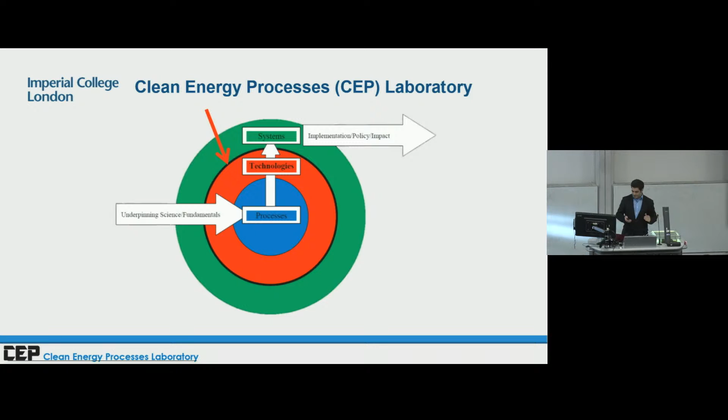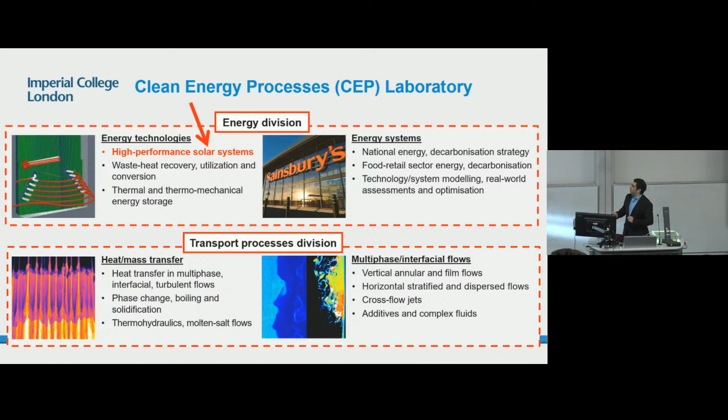So there are a lot of things going on in the group. We've split ourselves into divisions over the years, and unfortunately I can't present all of the work that's going on. I'm just doing that one bullet point, and I wanted to say thank you also to all the people that contributed over the years who don't necessarily fall into this category, but whose work has certainly helped the group in everything we've been doing.

So I'm going to start nice and easy. This is just motivation, and you'll be familiar with this — photovoltaics, the panels you find on roofs of buildings. But this picture is really about power generation: very, very large plants, typically in the desert, somewhere with sun and no people around. So photovoltaics, we're very familiar with this.

There's another technology which is very important in the context of large-scale power generation from the sun, called CSP, concentrating solar power. CSP is very different in the way it converts sunlight into electrical power, but nonetheless the overall concept or result is the same: harness the sun and generate electrical power.

Now these plots are quite interesting, and I'll say two quick things. By the way, these are real costs — these dots are real costs. This is something called the levelized cost of electricity, which is the total cost to produce a unit of electrical energy over the lifetime of a project — the capital cost, maintenance, operating cost, everything over the lifetime of the system.

At the bottom here there's a green bar, a range, an area, and that's where you'd find conventional fossil fuel generation. So I'm going to make two statements which aren't difficult to make at this stage, in the year 2020. One is that generating electricity from sunlight through these technologies, either one of them, is now competitive with conventional power generation. You might have been able to argue that solar is expensive 10 years ago — this is no longer true.

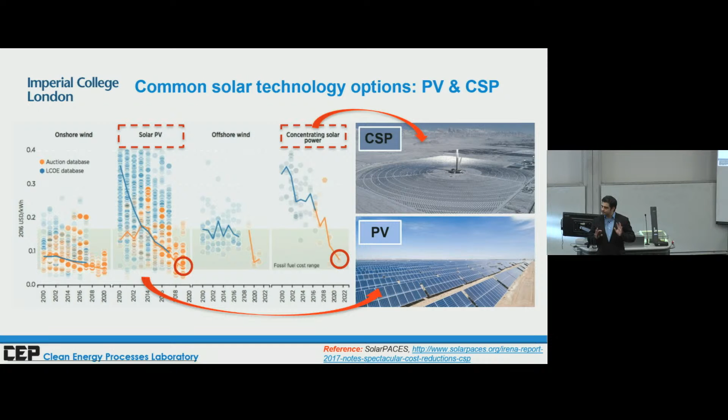The second thing is you might say, yeah, but these things don't work at night, and once you add the cost of batteries, the costs go up. Well, yeah, but CSP, which has dropped just like PV very significantly, these projects can have anything from 4 hours to 16, 17 hours of storage. They can run flat out almost, night and day. So the argument that solar doesn't work at night might have had some sway 10 years ago, but not anymore.

Now this is large-scale power generation, and I wanted to make the point that I'm not going to be telling you about large-scale power generation today. We're going to be talking about smaller systems.

So systems that you can install, so-called distributed applications, in your home, buildings, neighborhoods, communities, small communities, from a few kilowatts up to a few hundreds of kilowatts. Typically, these smaller systems in distributed applications are closer to cities where people live, and you have constraints. You can't just go out in the desert and put mirrors and start concentrating to get very high temperatures. Due to these constraints in space, you can't have too many mirrors, you can't get too high temperatures from the sun, so you end up with so-called non or low concentrating systems at low temperatures. It's not always the case, but it's typically the case that you're constrained in distributed applications, because there are buildings around you and people.

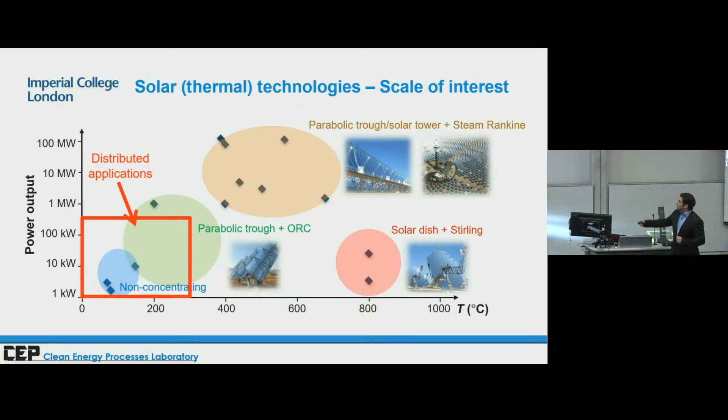So here's what we're going to be focusing on: smaller scale systems and lower temperatures. What's available to us? On the left-hand side, things that you probably already know.

So we have photovoltaics. You can install them on your roof. They give you electrical power. They're very dedicated for this particular job, generating electricity from photons from the sun, and they're very good at it. And on the left, you have something called solar hot water heaters. These are systems where there's a liquid that flows, typically might be water, might be something else. In any case, you heat up this liquid, you store it in a tank if it's water, and you use it later to have a shower or whatever else you want. Again, a very different job by a very different technology. But hot water, heating, electricity, these are energy forms that we both need.

So the question that arises at this point is, can we get both? Well, of course you can get both, you can just put the two systems side by side on your roof. But the question is, can we go one step further? Can we get both from the same panel, from the same collector area, and can we get them in a way where there's a synergistic benefit, where there's a benefit to the electricity and the hot water relative to side-by-side systems? And the answer is yes.

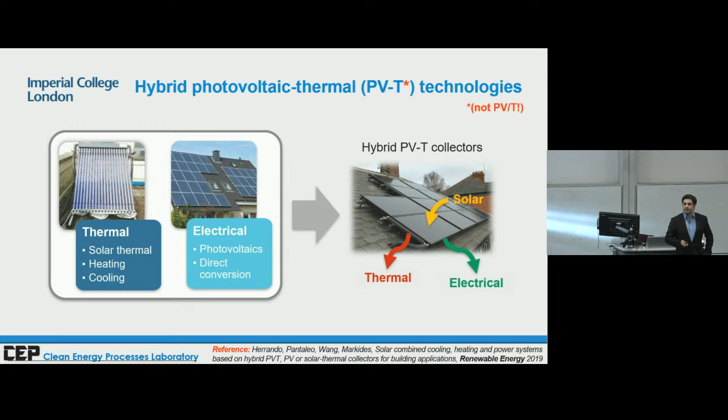There's something called hybrid PVT collectors, where the sun goes in, you have an electrical output, and you have a thermal output. That thermal output can be delivered as useful heat to an end user. So this is existing stuff, we didn't do anything new here, but why, and what is the synergistic benefit here?

So this is a plot of the efficiency of photovoltaic materials, different materials. You can pick any one of those lines you want. And what you find is that as the temperature of the cell gets higher and higher, the efficiency of that cell gets lower and lower. In most cases, linearly.

So I'll say two things. Number one, when is your solar system generating the most electrical energy? When it's sunny and warm, correct? So exactly at the conditions where you think you have the potential to generate a lot of electricity from your solar PV system, guess what? Your solar PV system is getting hot and you're losing a lot of power. In hot countries, this could easily go up to 70, 75 degrees. And that's a 20% drop in efficiency because the system is getting very hot. Now, a 20% efficiency drop is something like 5% of all of the power generation of Europe, lost globally, simply because of this. Just to give you a feeling for this, it's a large amount of power which is lost due to this efficiency drop.

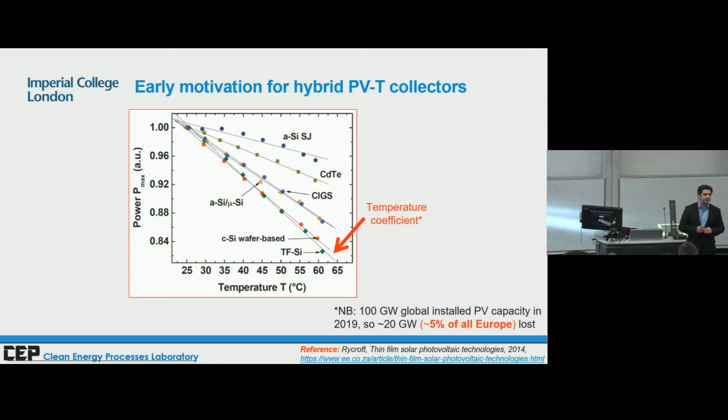Now, this is a problem, but it's also an opportunity, because if you really think about it, it's telling you another thing, which is that if you're able to go back the other way, from right to left, somehow by cooling the cells, then you can get a higher efficiency than you would have had otherwise, while at the same time having some heat to deliver. And this is where solar PVT comes in.

Behind that, you have a flow of some fluid. It could be water, it could be air, it could be anything you want. Most of the time, it's water or air. The idea here is that you have a very good thermal contact between the cells and the fluid, and that's what allows you to pull a lot of heat out of your cells. Now, there's another consequence of this, which is that the temperature of the fluid and the temperature of the cells are actually very close together because of this good thermal contact. We'll come back to this in a minute.

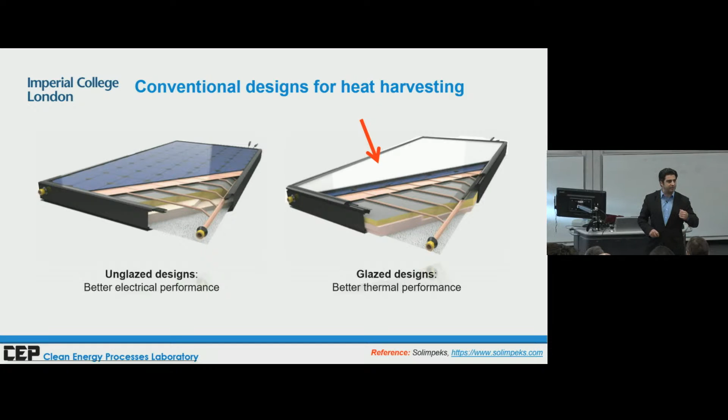And that's not good for us, because ideally you never want to trade electricity for heat, because electricity is much more valuable than heat. We can talk about how and why, but I think most people would understand that electricity is more valuable than heat. So you don't really want to play this game where you're losing electricity to deliver heat.

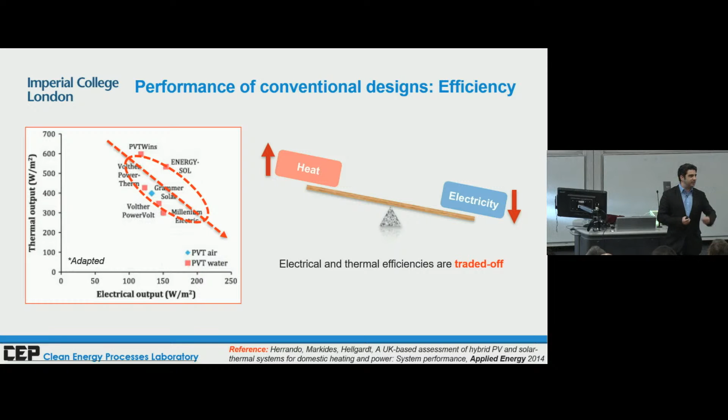Now, a second limitation to conventional PVT designs, other than this link between electricity and heat where you trade one thing off for the other, is that you're limited in terms of temperature. So we said a couple of slides ago that the temperature of the fluid and the temperature of the cell are very close together, and they're connected very tightly. So if you try to run your water stream very hot, so you can do a lot of things with it, your cells are running hot. And vice versa, if you try to cool the cells, then you're going to have a very low temperature thermal output, which is very bad for you. So that's a problem and a challenge for us.

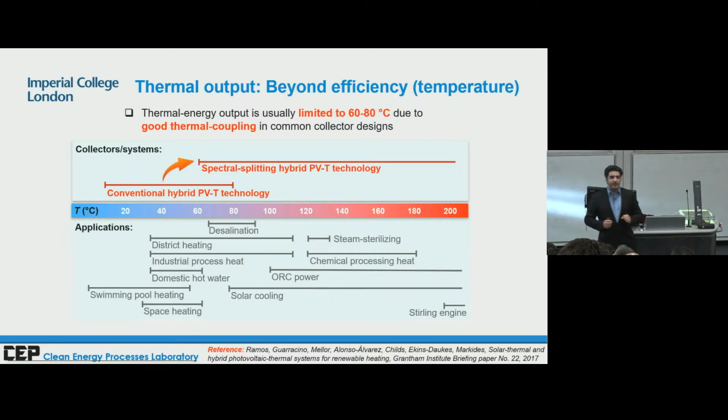So there are two things that we want to do. Number one, we want to break the link between the efficiency trade-off that we were talking about before, and also we want to break the temperature link. We want to have a very high thermal output in terms of its temperature, and we want to keep the cells cold. So how can we do that?

Well, we can do it by basing our designs on a very different principle to what conventional collectors are doing. Instead of connecting the cells to some kind of thermal absorber very tightly, we realize that sun is something which is broadband, right? It's distributed over different colors. There's UV, there are different colors, visible, infrared, different wavelengths. And photovoltaic materials are not sensitive to all wavelengths; they're only sensitive to some of them.

So could we magically take the sun, split it into two parts, one of which are wavelengths that the cells are sensitive to, and we send that to the cells, and the other one of which is wavelengths that the cells are not sensitive to and not send it to the cells, because all they're going to do is just heat up the cells unnecessarily. They cannot become electricity, right?

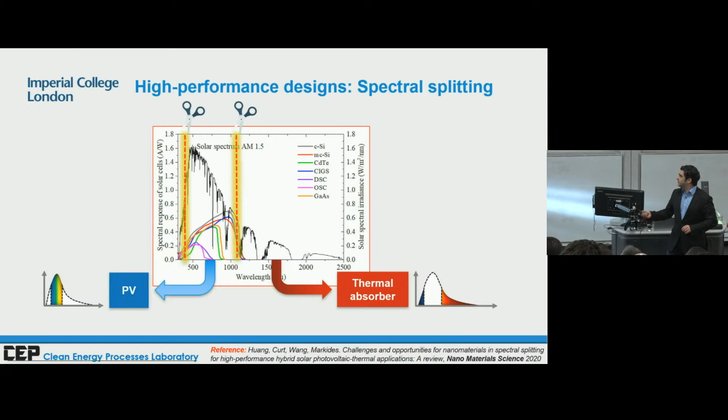Can we do this? Can we split these two things? And the answer is, well, yes, we can. There are many ways to do it. We can preferentially reflect some wavelengths using magical mirrors. We can preferentially absorb different wavelengths by using magical filters. And we can use semi-transparent solutions, and I'll show you some of this stuff a little bit later on. But there are ways in which we can do this.

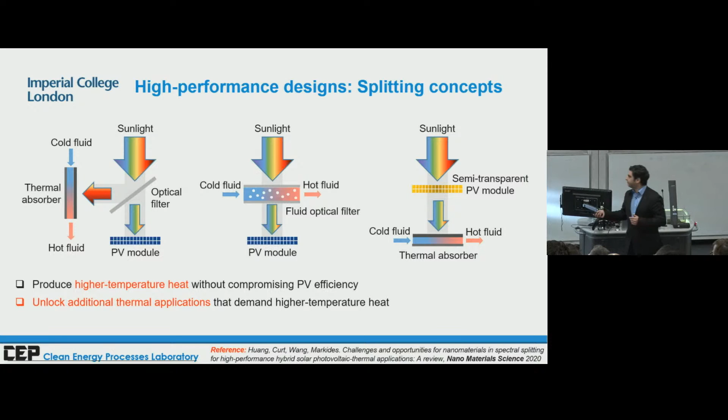And there are designs in literature that have been proposed. Here I'm just giving you a couple of designs that rely on preferential reflection of some parts of the light to something that gets hot, while the rest of it goes through to the cells.

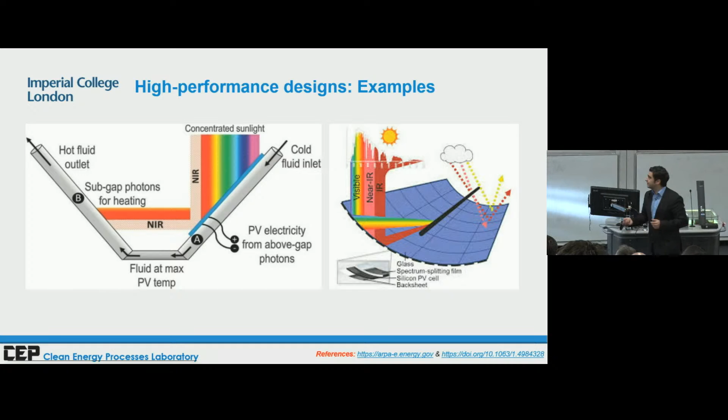Okay, so that's the background. Now, what have we done? Because all of that is work that other people have done, right? So this is us riding on the shoulders of giants. That's where we were, and this is where we come in.

So I want to take you through a journey where we start from the fundamentals, the science. What materials should we use? Let's go to engineering. How do we design components, collectors? How do we optimize those collectors? And then how do we use those collectors within wider systems to really understand what potential they have in real applications? Okay, let's start from science.

What materials should we use for spectral splitting? What materials and coatings can we use to suppress heat losses? And I'll just say one word and go quickly to the next slide: in a PV panel, losing heat is not a problem, because if you lose heat in a PV panel, you're cooling your panel, you get more electricity, that's great. But in a PVT collector, heat is something you want to deliver, so you don't really want to lose it in the first place. You want to trap it.

There are two ways in which heat is lost: by convection and by radiation. Cutting down convection losses is easy, right? You can pull a vacuum, you can put this glazing layer, and you can pull a vacuum, and vacuums are very good at suppressing convective heat losses. So that's good for us.

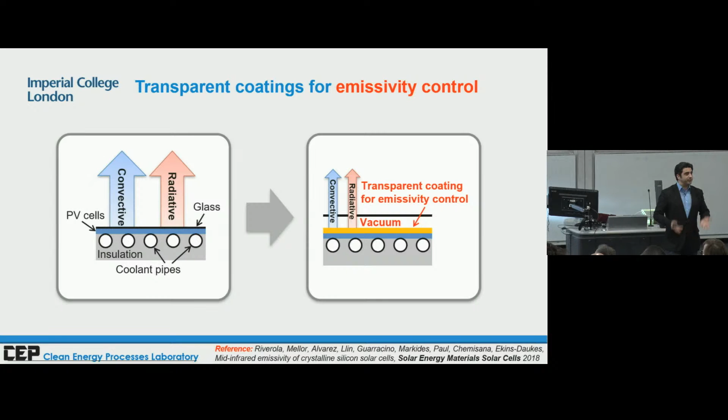But how do you suppress radiative losses? Well, those of you that know about radiation will also know that there's something called emissivity, which is a property of some surface that tells us how much it can emit radiation outwards. So we could just have low emissivity, which means it's not radiating outwards, so we're trapping all the heat and not losing it by radiation. And that's easy to say, but there's a problem: emissivity and absorptivity are the same thing. So if you have a surface with very low emissivity, it also has very low absorption, which means you're not trapping the sun in the first place.

You're not absorbing the sun's energy, so how do we overcome this problem? Well, we overcome it by having so-called emissivity control, or selective emissivity, which means that at the wavelengths where the sunlight is coming in, we want a very high absorption. And luckily for us, at the wavelengths where your surface is re-emitting as a black body, which are separated, we want a low emission, so we don't want to re-emit that back out. So we want to trap the sun and not send stuff out.

And there are ways to do this, and this is some work we did with a very good colleague of mine who was at Imperial. Unfortunately he's now left, he went to Australia, Ned Ekins-Daukes, where we tried ITO coatings to see whether we could affect the emissivity of silicon solar cells when we applied them as coatings. And the answer is yes, you can. The real question is, by how much? How are you affecting the efficiency? We'll come back to that later.

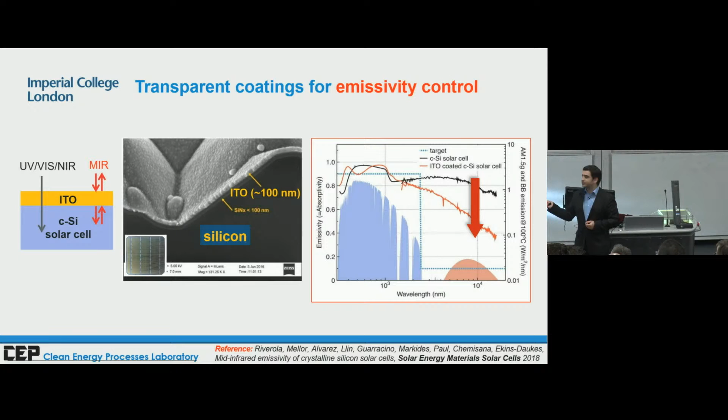Now, what do we do about these optical filters, these spectral splitting filters? I know this is a complicated picture, but if you really think about it, what we've just said is that some part of the spectrum needs to be split off and sent to the cells. So the question is, which part of the spectrum? Which are the two extreme boundaries of wavelengths that we need? And the answer is, well, it depends on a lot of things: the photovoltaic material, the concentration, and a lot of things. But it also depends, and this was a very nice bit of work that Gan did over here, who's going to help in a minute.

So there's another thing it depends on, which is the relative value between heat and electricity. How much of the spectrum gets sent for electricity and how much for heat depends on this value between electricity and heat. And there are many ways to define this value. You could define it thermodynamically, based on second law arguments, or it could be an economic value. Heat and electricity cost different things.

You could define it different ways, but whichever way you define it, once defined, you have maps that generate for different PV materials, which are the limits of the part of the spectrum you want to split off, and if you do that in an ideal way, what the efficiency is of that particular solution.

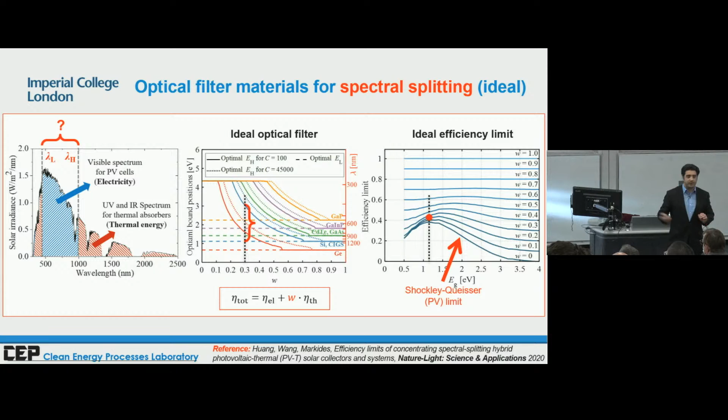So this is ideal stuff. But how do we do it in reality? Well, there's a lot of people working on nanofluids, which is liquids with suspensions of particles in them. They're very good at absorbing different parts of the spectrum. All of this absorption characteristic depends a little bit on the material, the size of the particle, the shape of the particle, the concentration. So there's a lot of work going on.

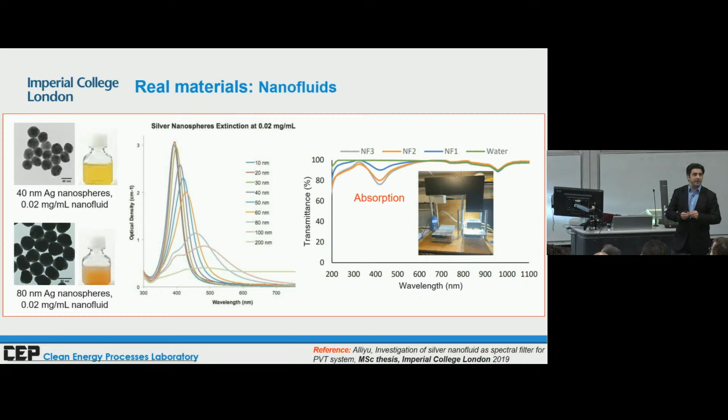We've done a little bit, but not a lot in this space, because there are problems with suspensions, typically that the particles can agglomerate and come out of solution, and that's a problem. So we took a different route.

We said, why don't you try to absorb into a liquid phase itself? Liquids can absorb. Water is a very good example of this. Water absorbs infrared very well.

And if you look at groups of different chemicals, there are different types of bonds and different chemical substances, and those have very different characteristics. So we're applying a methodology called molecular design, and we're at very early stages of this, but conceptually I think you get the picture here.

What we're trying to do is identify the absorption characteristics of different types of groups. And if we know those absorption characteristics and we know what type of filter we need, then which combinations of those groups would give us the optical filter that we need.

This is the type of approach that in chemical engineering is quite common. It's applied to solvent design, working fluids for different types of cycles and things like this. It's a known approach, it's just the first time it's been applied to this type of problem.

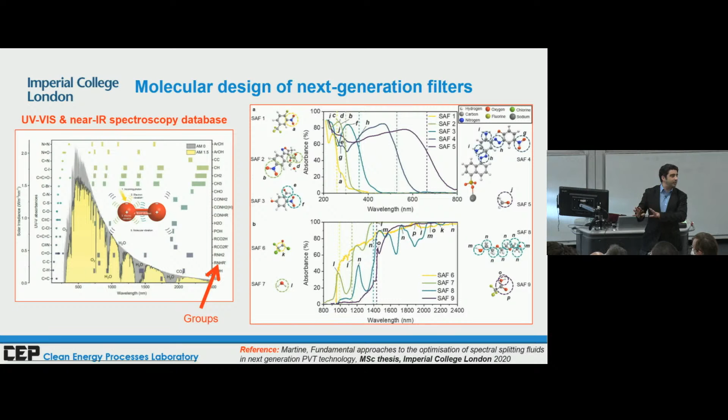There's another very interesting possibility, which is that you can also shift the wavelengths of light. So if you had a way of taking some of the UV that your cell is not sensitive to and moving it into the visible that your cell is sensitive to, that's very useful for you. You can get a higher electrical efficiency. And there are ways you can do this.

We've been investigating hydrogels, doped so they're naturally porous as a material itself. So you can add nanoparticles to these hydrogels. There are different types of particles that you can use. We've been using some organics, and we've proven that this can be done. It's still at a conceptual level.

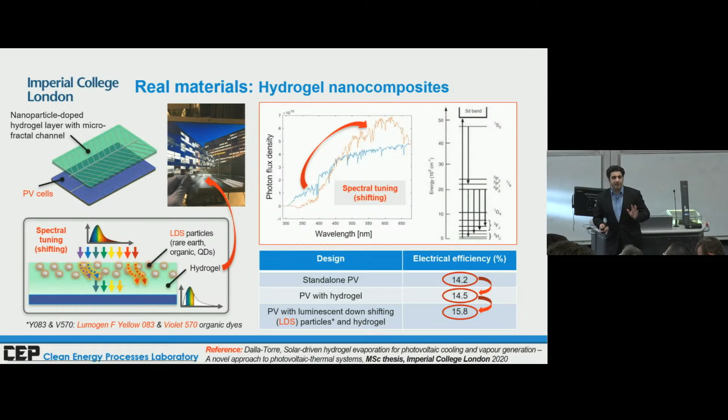And then there are approaches based on semi-transparent cells where we have a slightly different arrangement. The light goes first through the cell, and then whatever doesn't get converted to electricity flows straight through. And of course here there are a lot of questions about what would be the material you pick for your cell, and so on and so forth.

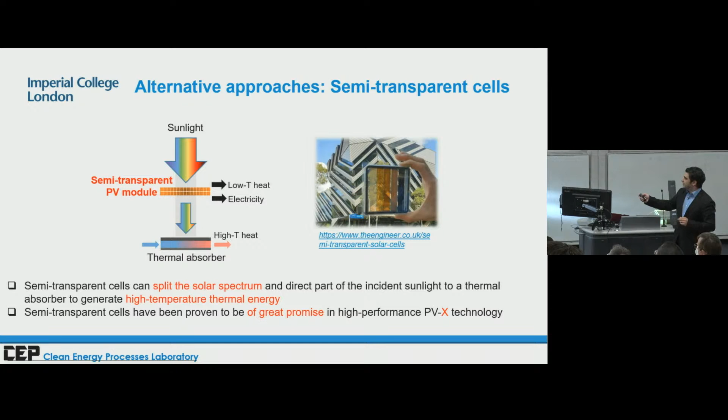Unfortunately, I'm going to have to skip some of this, because I want to go from discussing a little bit the materials and the cell types and the fluids that you use and your filter to, okay, how do we now design a collector? Because we need the technology itself.

So there are two ways, and we've done work on both of these. One is through modeling. We need sophisticated models, typically three-dimensional dynamic models that can describe the operation and performance of different types of collectors. These are the models where, knowing the optical properties, the emissivity, the absorptivity of different coatings, the conductivity and the thickness of different layers and how you arrange them in geometry, would allow you to predict from those properties what is the electrical efficiency and what is the thermal efficiency of this collector. And so there are different designs.

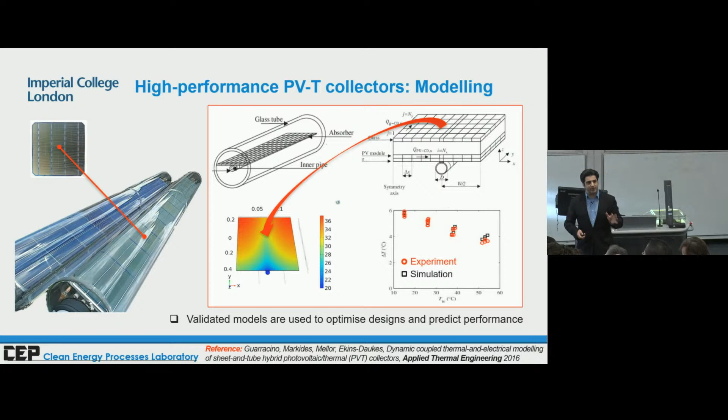We can apply them, we can validate them. So you see this is a typical result where you do some experiment, you validate your model, you trust it a little bit more, and now you start making changes to the design.

What you see here is a collector on the left-hand side. It's a bit bright, but you can see there are cells inside a tube. That tube is there to pull a vacuum, so you suppress convective losses. The other thing you can see is that there are two tubes, and one of them looks slightly different color, a bit greenish yellow. That's because the cells have been coated by ITO, which is basically to control the emissivity and suppress the radiation losses.

So the second thing you want to do is go away from all the modeling, and now you have to start doing some actual testing. And these are real tests where we can demonstrate that due to this emissivity control, you have a significant thermal benefit relative to if you didn't have coating applied. But these are still conventional designs.

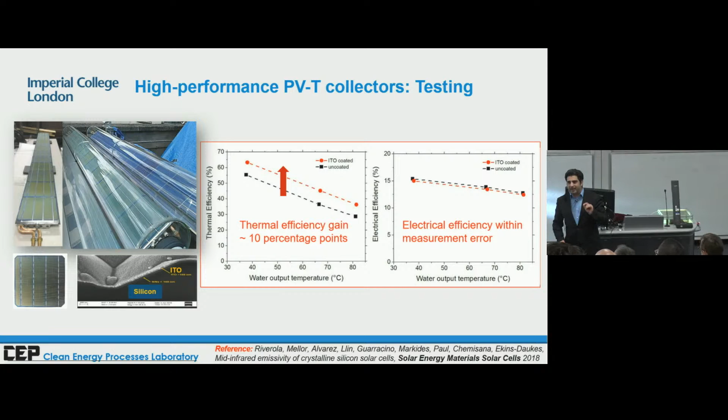There's no spectral splitting involved here. So if you look very closely, there's a small electricity penalty that you pay to get that benefit in thermal performance.

So this is a spin-out coming from the department that I've been involved with, and here we've been doing experiments on spectral splitting collectors. And by the way, this is a real thing, and it's over here, and if you want to come later, you can see what it looks like. But the point here is that now we're going to tests of real spectral splitting type collectors.

And this is a lot of work that we did up here on the roof. Believe it or not, there is sun. Not as much as in Cyprus, but there is sun, so we've done some tests here.

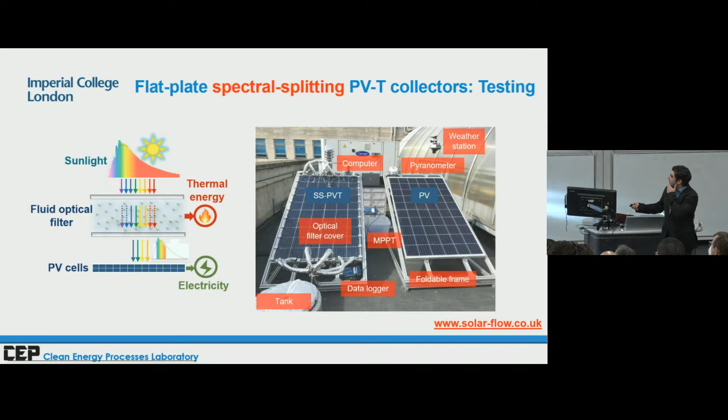You don't want to sacrifice electricity, but you have added extra heat from the same area. And this is the result that you'd want to show.

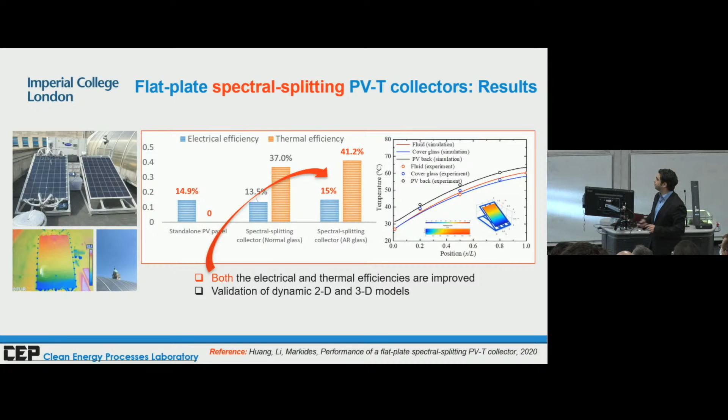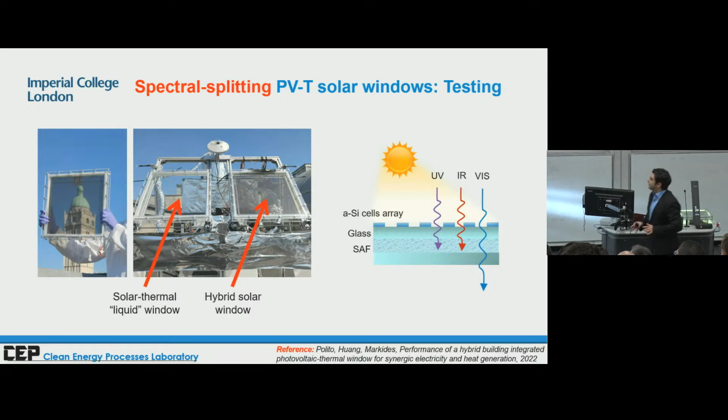Some nice little other things that we're looking at, and I think now I want to do a little bit of a demonstration. So Gan and John, if you can help me out. So here we have - come on.

So here we have a semi-transparent PV window. I spoke to you a little bit about this semi-transparent stuff a few slides ago. And what does this do? Well, it's basically exactly what Gan is showing you over there. It's a window, so you can see through it, but it can generate electricity, because there's a photovoltaic material somehow in that window.

Now what we've done is we've taken that window and we've built it into a hybrid PVT collector, which means that there's a fluid behind it, and that fluid can be used to extract thermal energy. So what we're going to do now is we're going to show you why this thing works.

Okay, so here you can see Gan's hand, visually, so that's great. If he puts it behind, you can still see it. So that means visible light is going through - it's going through the liquid layer, which is a filter, and it's going through the cell, which is semi-transparent.

And what GAN is going to do now is show you what you see through an infrared camera, which means what happens to the radiative heat. So let's do that again.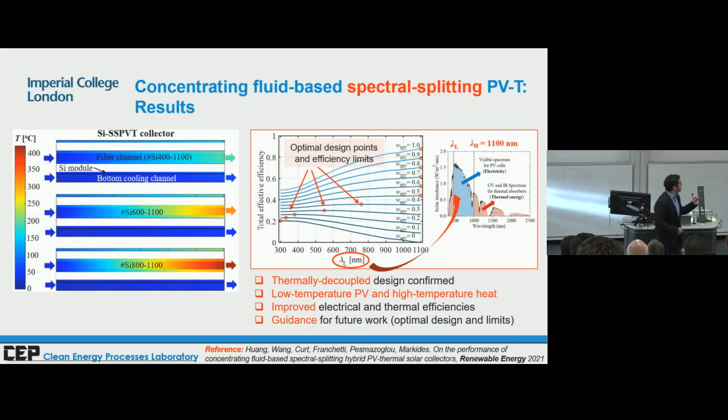And now there's a nice project—I'm going to skip this. So there's a semi-transparent modeling of all of that stuff. But I'll go very quickly to that, which is the next step: an experimental validation of all of these simulations of high-temperature concentrating PVT systems.

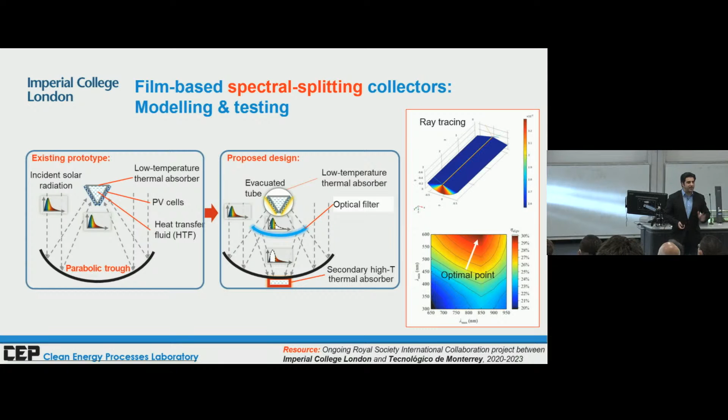There's a project funded by the Royal Society in collaboration with Mexico. One of the researchers involved in this is actually here, came from Mexico to spend some time with us. The idea now is we want to try to test some of these ideas on a real concentrating parabolic trough collector, which they have done in Mexico. So experimental work is going on in Mexico. Hopefully I'll have some good news for you soon.

And this is the last bit I want to say before we move on to some system level work, which is that there is a challenge with heat. I've been in this area for a long time, and the challenge with heat is that it doesn't have a very high value. The second challenge is that it tends to be available where there's a lot of sun. So having a PVT collector in Saudi Arabia, it's going to be great—you're going to generate a lot of heat from a PVT collector, but the Saudis are going to say we don't really care too much about that, which they've told me.

Most hot countries have a lot of sun but don't need heat. So can we have some kind of embedded, integrated converter that takes that heat and turns it into things that we actually do care about? For example, we might care about clean water, we might care about cooling. And there are processes that can do this conversion. The real question is, can we do them internally, not downstream, not as a separate process? Yes, that's, in inverted commas, easy—you can do that with existing technology. But can you do it within the collector itself in a way which is synergistic, so that the fact this process is happening inside the collector is giving you a higher electrical conversion than it would have otherwise?

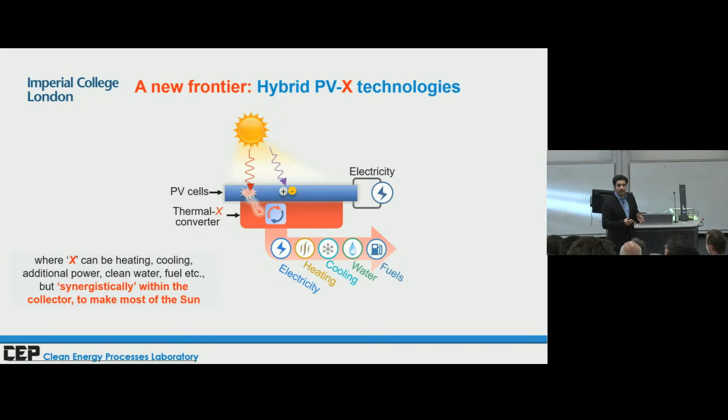And we've started working on this, and there's some very nice work that Gan is doing. By the way, there's something that's been running here on the right-hand side—I don't know if you've noticed it—which is a little demonstration we call PVD. D stands for desalination: can we generate electricity and desalinate water inside the same collector at the same time, in a way that the desalination process results in a higher electrical performance than if you just had PV?

He'll show you a little bit more about this later, but there's a whole area here of using transpiration cooling, inspired by nature—capillary-driven flow, so you don't use a pump—through these types of sponge layers or bamboo or other types of materials I'll show you in the next slide, so that you can drive a flow through these collectors passively without a pump.

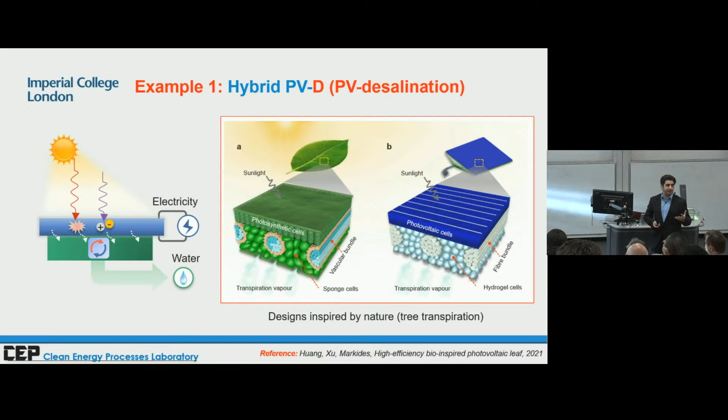And this is what happens. So this is the design that you can see here under the solar simulator that's been running from the beginning of the lecture. I forgot to tell you, but this started empty, that little glass over there, and hopefully there'll be some water in it at the end, okay?

But basically what we do here is we have some kind of fiber, and there's a liquid that gets transported on the fiber due to porosity and capillary action. The water gets evaporated inside these small pores, turns into vapor, and then gets collected somewhere else. And then, yes, we have the ability to deliver clean water, but what we've done is we've taken energy away from the cells, and therefore we've cooled it down.

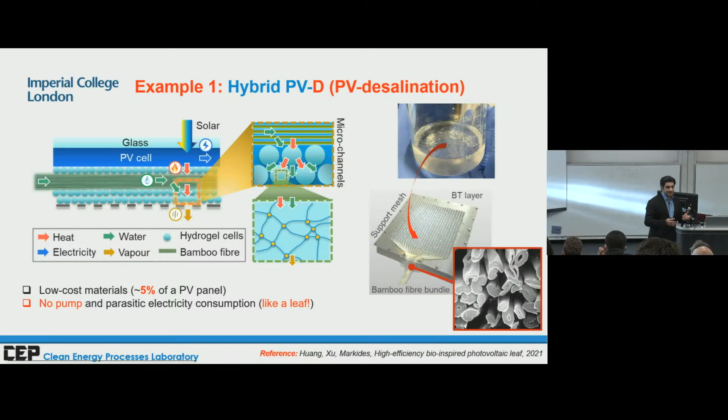So I'll show you a very quick result here. What you can see is running under a solar simulator. Instead of reaching, so a PV cell without doing what we're doing would reach 70 or 80 degrees under a solar simulator. Doing what we're doing means you're dropping down to a little bit less than 50 degrees, so that's a significant drop in temperature. At the same time, you're generating the water that we just mentioned.

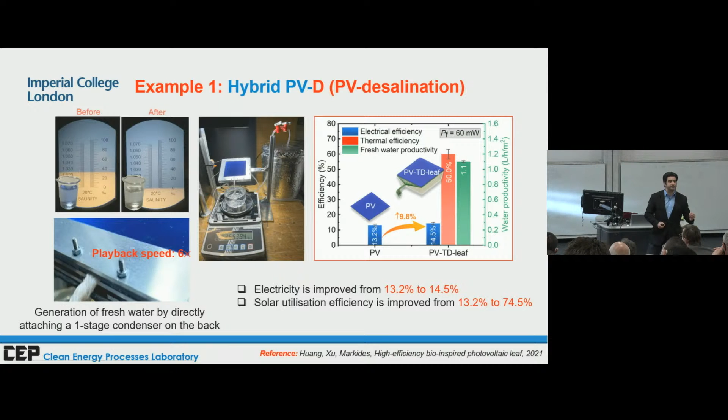Trees of the future, or something like that. Yeah, this is a nice picture. Gan, thank you. I like this one.

All right, and this, again, at the conceptual level, is a little bit early stage for us. There are processes to produce hydrogen. Is there a way for us not to use the heat and electricity downstream, but instead run these processes to generate hydrogen within the collector, in a way that takes away some of the heat and allows the cell to run at lower temperatures? This is a collaboration with UNSW, a colleague of ours there.

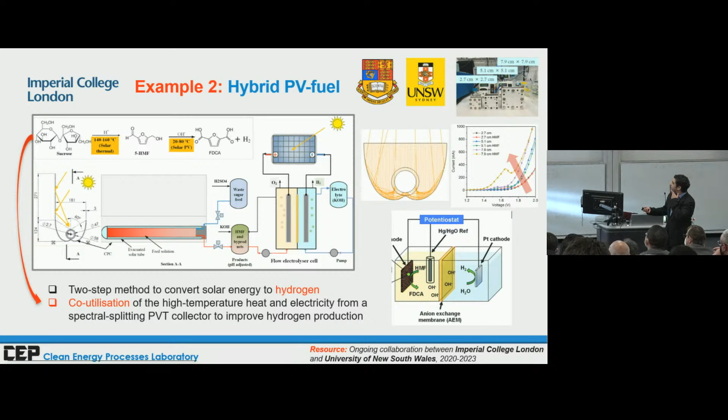Okay, at the systems level, we're going to go a little bit faster now. So we have very complicated systems with multiple processes. We have collectors that generate heat and electricity. That could be stored, it could go to a user, it could go to the grid. There could be downstream processes that we said we were trying to avoid, but they could still be there. There's no reason why you can't use the heat to run an absorption chiller, and no reason why you can't use electricity to drive a heat pump, and so on and so forth. There's a lot of complexity.

And so in order for us to understand the potential of these systems, we need to try to run different configurations for different applications to see what the benefits are. We need to look at the economics, the environmental benefits of these systems, and we need to look at them relative to the alternative.

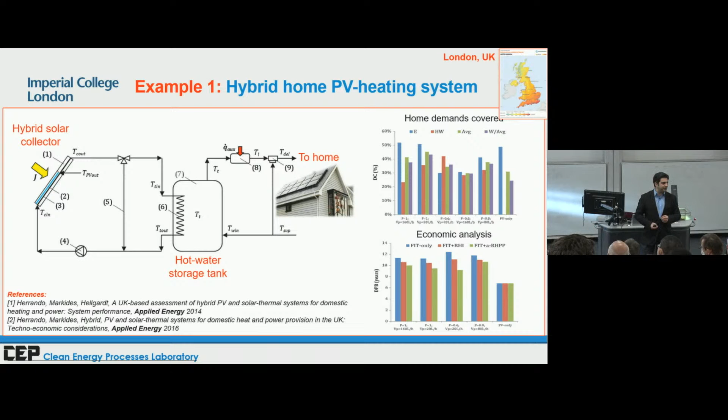You're always space limited. There's always the question of, well, I only have a certain area available to me, you can't just say I can do whatever I want. And the question is, given some space limitations, what fraction of a home's demands can you cover? What are the economics of all this, and the benefits, and so on?

You can go to slightly larger systems, and you can now look at processes where you don't need the heat, you don't need the hot water, but you need cooling. So we've done a lot of this work as well.

I'm not going to go into the details of it, but it's basically the same picture, right? Different geographies, different applications. This is actually an industrial process, a dairy farm, and they need a different energy output. They need cooling, they don't need hot water.

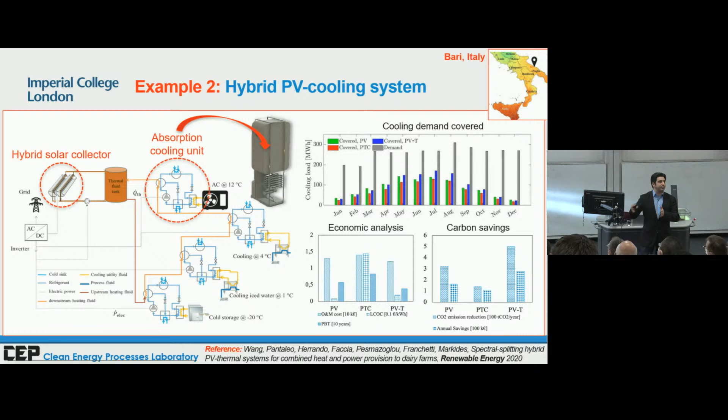And here we need an even more complex system. We have an end user that requires heat, cooling, and power, and we're getting all of those from the same type of collector. We need to try to control the system and deliver different things at different times. And the questions are always the same: given some area, how much of the demand of this plant can we cover, what does it cost, and what are the environmental benefits?

Okay, do these systems make sense? The simple and easy answer, or the cop-out answer, is it depends, because it always does. But I think we can draw some conclusions. Over the years we've done enough of these case studies in different countries, in different climates, for different types of systems, small ones, big ones, for industrial applications, heating, cooling, whatever. There is some kind of message that's coming across here, and the message is this.

Relative to, let's say, just PV, because most people are familiar with this, these systems are more expensive. That's obvious. They take longer to pay back your initial investment, but they always result in a larger reduction, or a larger mitigation in emissions or equivalent emissions from the home. And they always deliver additional energy to the home, so they always make some home or building more independent from energy sources that it relies upon.

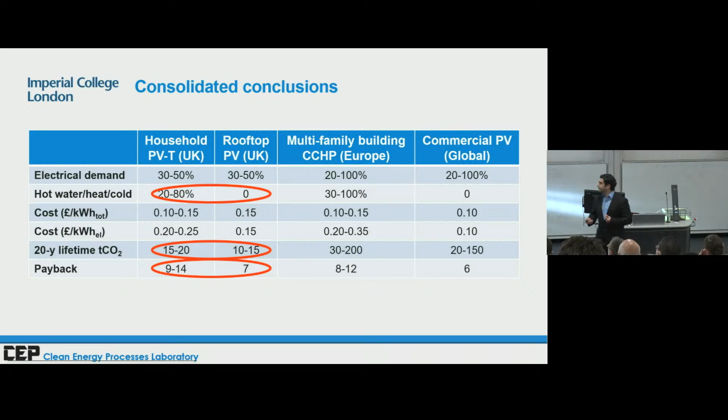My lecture is over, but as I was writing these slides, I just want to say a couple of things, if I may. I was asking myself, how did I get here? And I mean academically, let's keep it focused.

Now I'm going to say something about Soteris Kalogirou, a vote of thanks, he's after the questions. He thinks we met about 10 years ago, and I never told him this, but actually we didn't. We met in 1992 when I was 14 years old due to a bizarre incident which involved smuggling sandwiches into the school at recess. The canteen was really that bad, and we just went out carrying sandwiches in with us to give to everyone in class, and we got caught and were expelled for 2 days.

Now, most people, when we were expelled from school, would go to the beach or stay at home or whatever. We decided to take a taxi and drive 1 hour, which in Cyprus is a very, very long way, as far as you can go. So we took a taxi with parental permission, and we went all the way to Nicosia to see this guy, Soteris Kalogirou, that I had heard was working on solar energy in a place back then which was HTI, which doesn't exist anymore, he's now in a different institution. That was the first time I met him. He probably doesn't remember this. And that got me into solar energy in general.